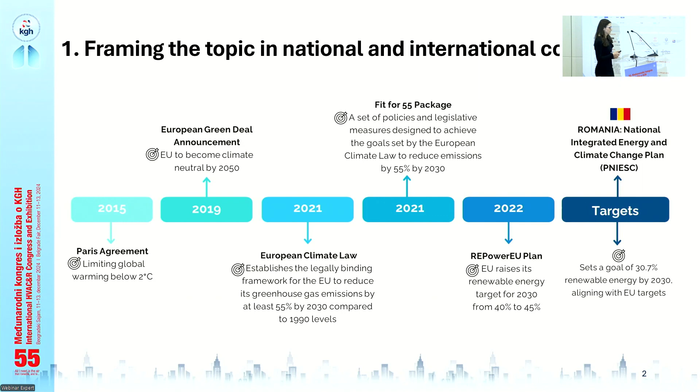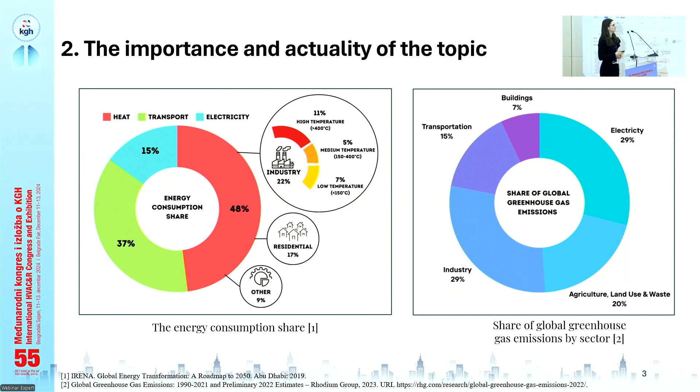48% of the energy demand is consumed as heat, and 29% of the greenhouse gas emissions is represented by the industry. In this context, heat recovery and storage systems can play an important role to promote a sustainable future.

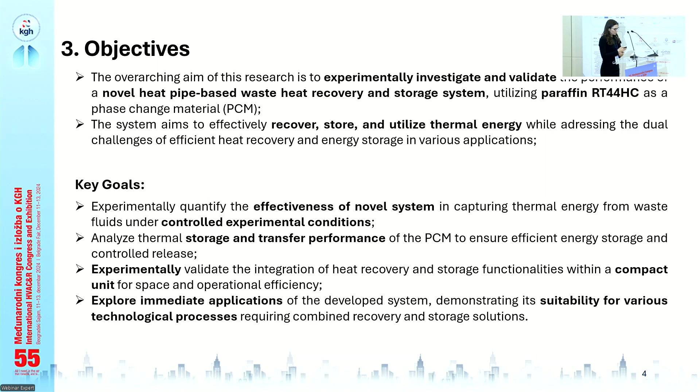The aim of this research is to experimentally investigate and validate the performance of a novel heat pipe-based waste heat recovery and storage system utilizing paraffin RT44HC as a phase change material. The system aims to recover, store, and utilize thermal energy while addressing the dual challenges of efficient heat recovery and storage in various applications. Among the key goals are quantifying the effectiveness of the novel system, analyzing the thermal storage and transfer performance of the PCM, experimentally validating the integration of heat recovery and storage within a single compact unit, and also exploring the immediate applications of this system.

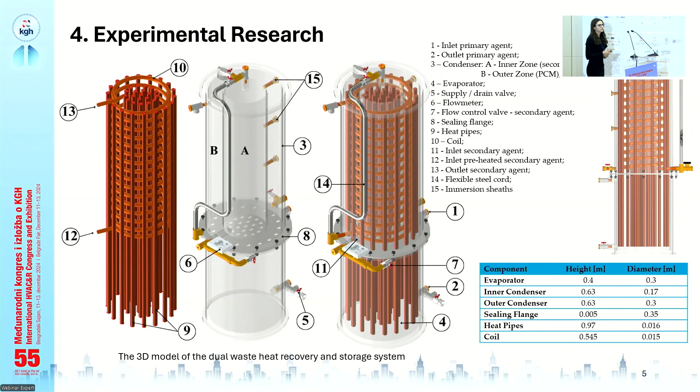The secondary agent heated in the inner zone can be rerouted through a coil which is embedded within the PCM in order to extract the thermal energy stored within the PCM. Also, the primary agent from which the heat is extracted, which flows through the evaporator, is water. In our experiment, it was water generated by an 8 kilowatt electric heater.

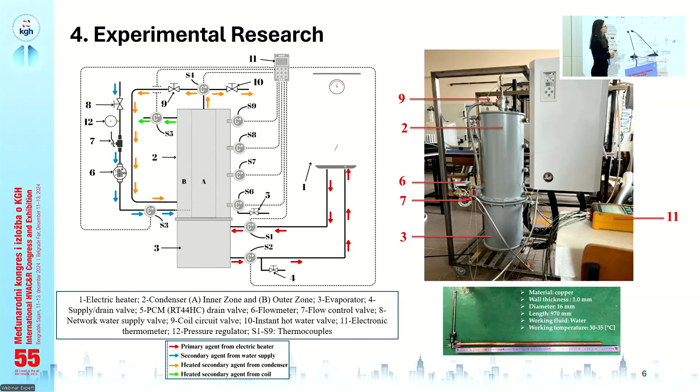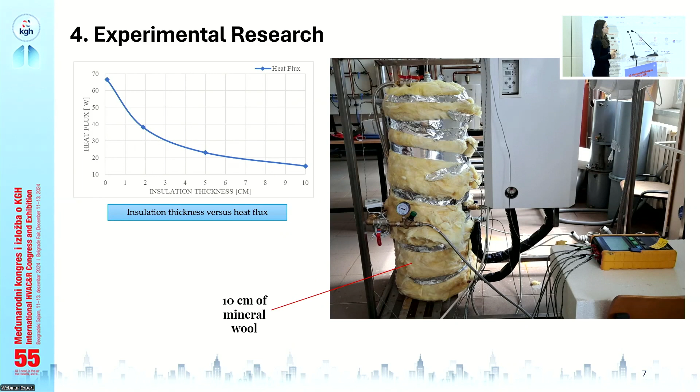The temperature is monitored by 9 type K thermocouples, which are placed in the inlets, outlets, and also along the PCM from the base to the top. The temperatures are registered by an electronic thermometer. Also, in order to prevent heat losses, 10 centimeters of mineral wool was chosen.

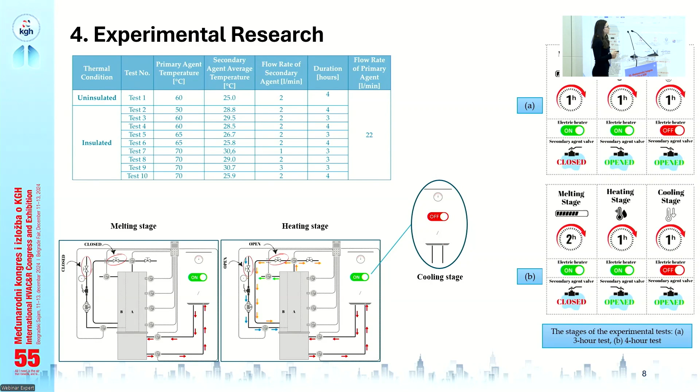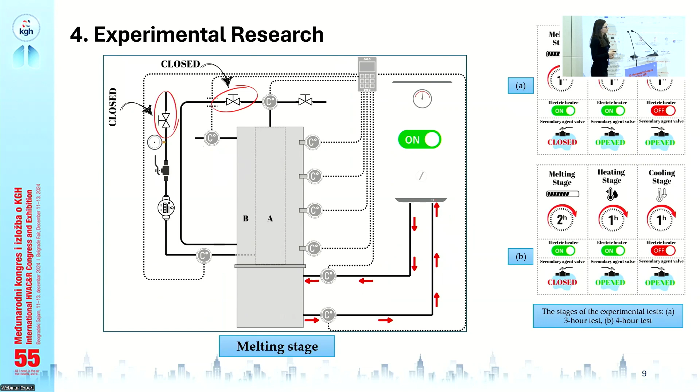We divided the experiments into 3 stages: melting, heating, and cooling. In the melting stage, the valves for the secondary agent were closed while the electric heater was turned on in order to focus all the thermal energy towards melting the paraffin.

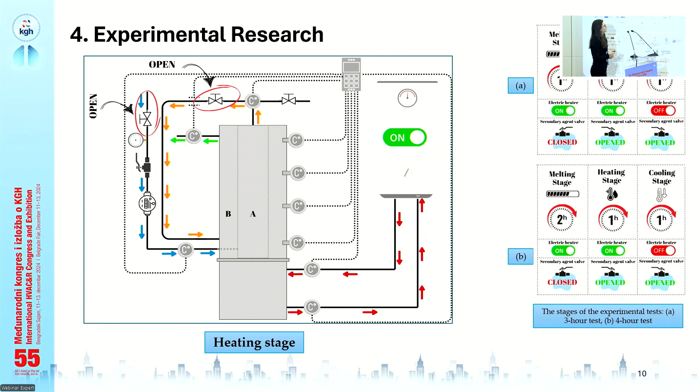In the second stage, the valves were open, allowing for the secondary agent to circulate through our system and to generate instant hot water. In the third stage, the cooling stage, the electric heater was turned off, allowing for the secondary agent to absorb the thermal energy stored within the PCM.

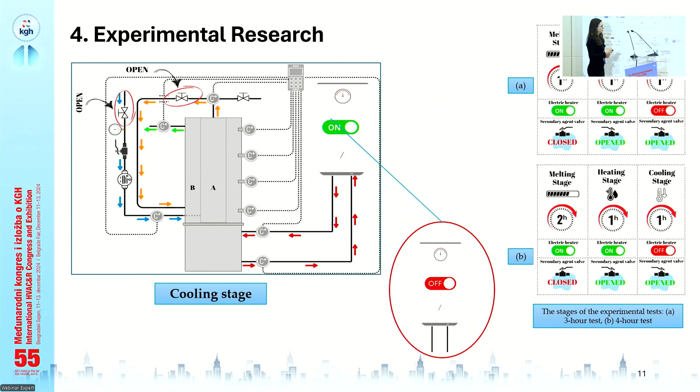For the analysis, we grouped the tests based on the parameter varied, and here we can observe the sensors which were placed in our system.

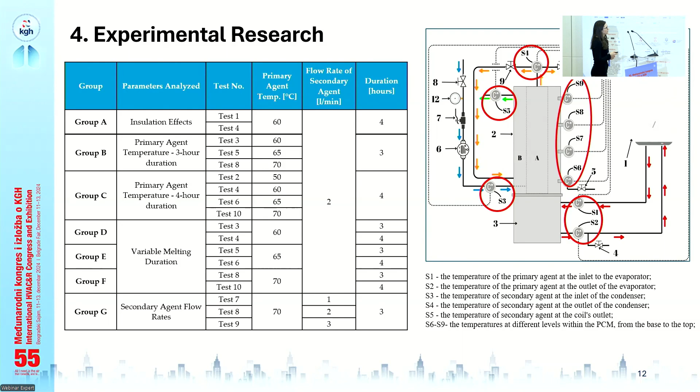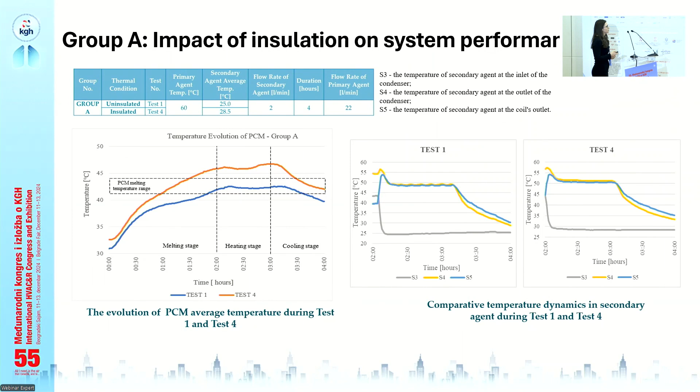For the first test, this served as a baseline scenario, which was conducted without insulation, and validates the fact that the insulation promotes both a better melting, a faster melting, and also higher temperatures in the secondary agent.

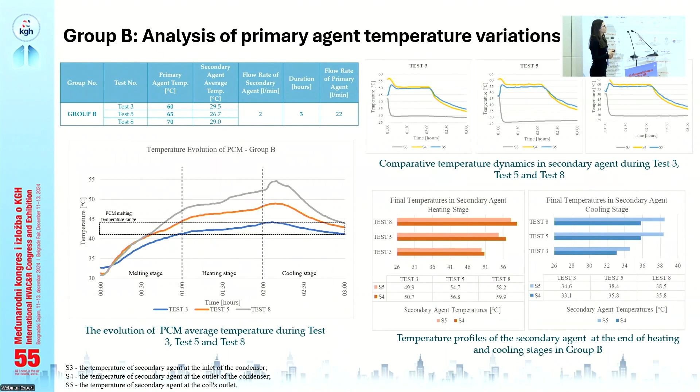Group B focused on the analysis of the primary agent variation. The primary agent was varied between 60 and 70 degrees, while keeping a 3-hour duration test. Test 8 performed the best. This demonstrates that having a higher primary agent temperature results in more sustained temperatures within the PCM and also the secondary agent.

Group C focused also on varying the primary agent temperatures, but having a duration of 2 hours of melting. We also employed a case with 50 degrees for the primary agent. This was notable and validated that our system can effectively recover thermal energy even with a lower primary source.

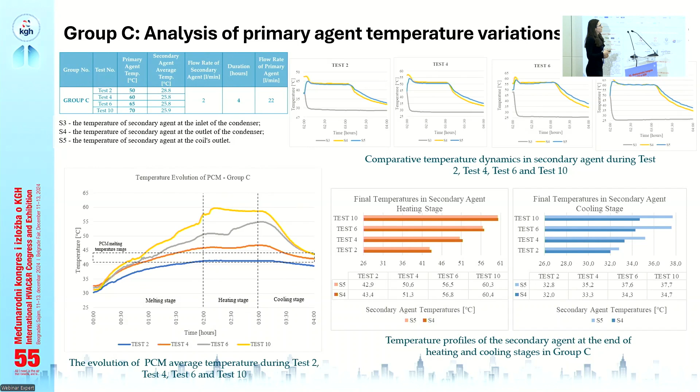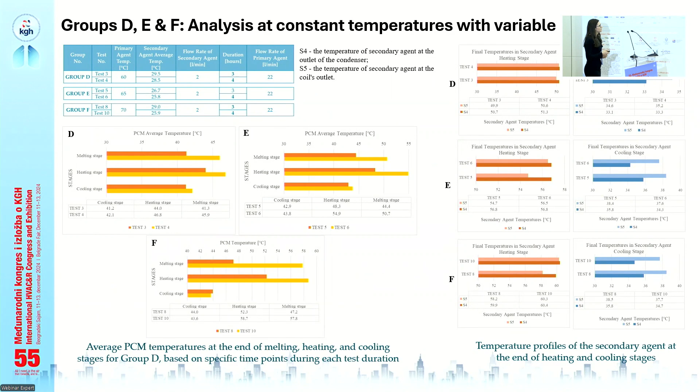Group D, E and F focused on varying the primary agent temperatures at 60, 65, and 70 degrees, with a duration of 3 and 4 hours. This demonstrates that extending the melting phase is very important, because as we can see, in the melting, heating, and cooling stages, we had the highest temperature in the 4-hour duration tests.

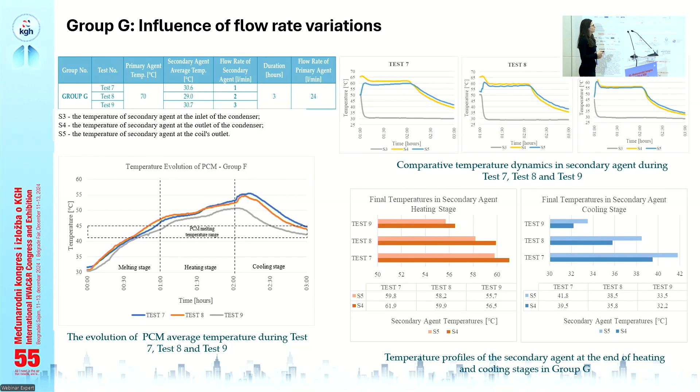The last group focused on varying the flow rate for the secondary agent to 1, 2, and 3 liters per minute while keeping the primary agent temperature constant. Observing the temperature evolution of the PCM, we had the highest temperature in the case employing the lowest flow rate. This also demonstrates that the system performs best with lower flow rates for the secondary agent and higher temperatures.

In terms of efficiency and performance, here we can see some graphs with the temperature gains in the heating and cooling stages. From the 4-hour duration test, test 10, which employed 70 degrees for the primary agent, performed the best, gaining 34.3 degrees Celsius during the heating stage and 11.3 degrees in the cooling stage.

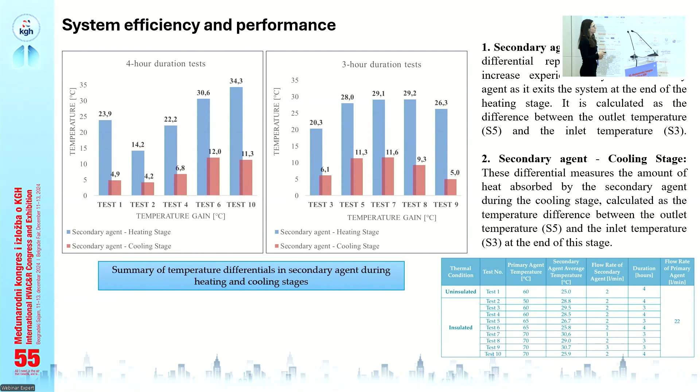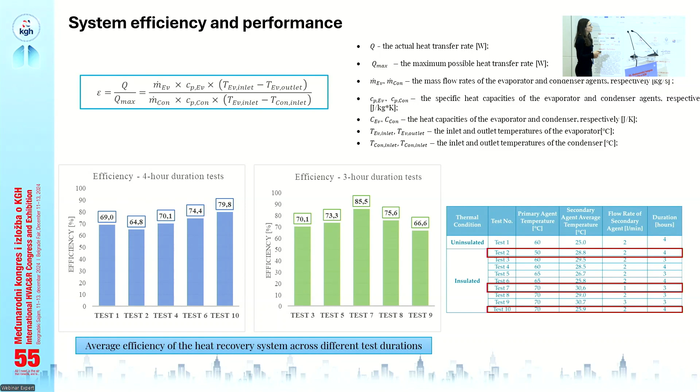And in the 3-hour duration test, test 7, which employed 1 liter per minute and 70 degrees for the primary agent, had the best results. In terms of efficiency, again test 7 had the best efficiency of 86%, while test 2, employing 50 degrees for the primary agent, also has notable results.

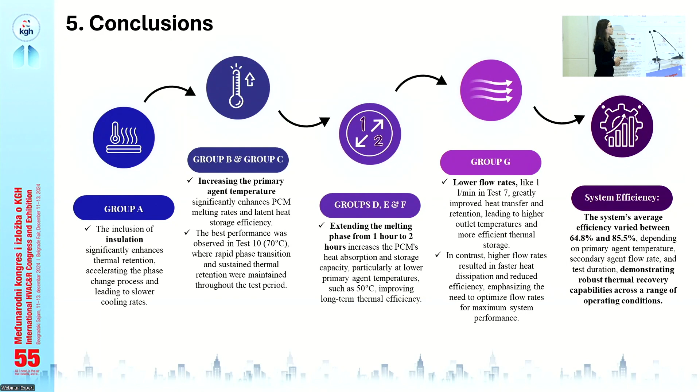As conclusions, the inclusion of insulation enhances the thermal retention, and also increasing the primary agent temperature along with extending the melting phase from 1 to 2 hours and lowering the flow rates prove to be optimal for the system. The system's average efficiency varied between 65 and 86%, which demonstrates its robust thermal recovery capabilities.

Before going to the potential applications, it's important to note that this system captures thermal energy from low temperature sources. It utilizes high efficiency heat pipes for almost instant hot water production. It incorporates paraffin as a phase change material, and it has a dual functionality within a compact and efficient unit.

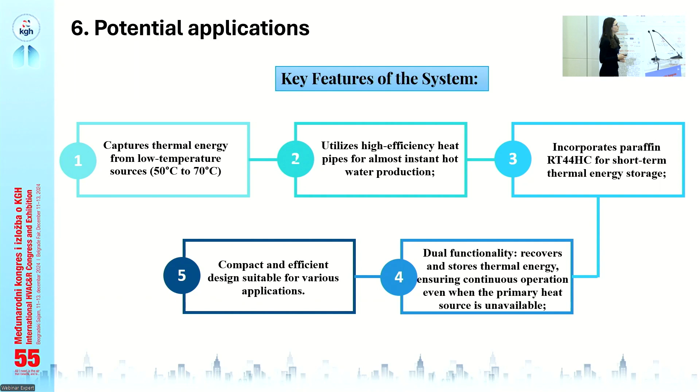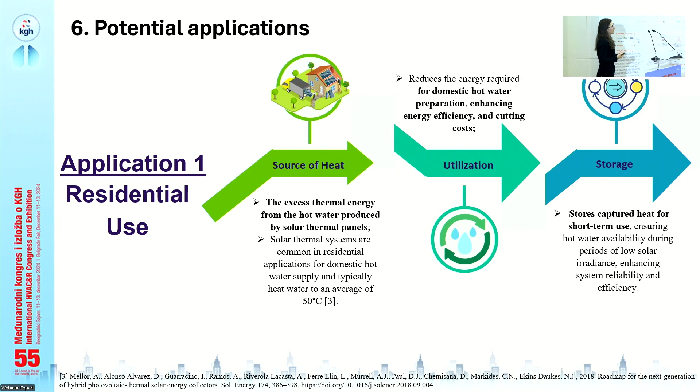This system can be utilized in residential use, where it recovers thermal energy from the hot water produced by solar thermal panels, from the excess thermal energy, which has an average of 50 degrees Celsius. In this way, we can reduce the energy required for domestic hot water preparation, and also we have the ability to store the captured excess heat for short-term use.

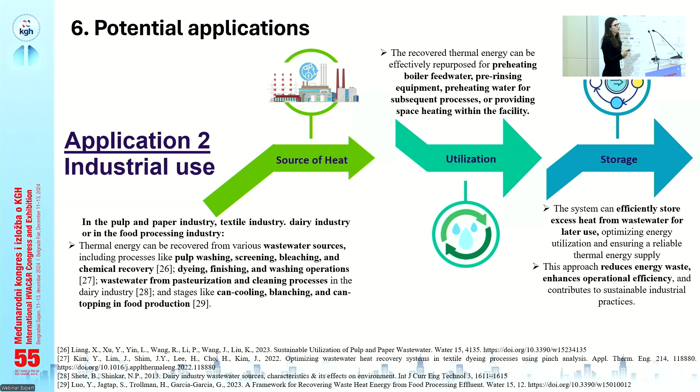And in industrial use, it can be used in the pulp and paper industry, textile, dairy, or in the food processing industry, where thermal energy can be recovered from various wastewater sources and processes. We can use the thermal energy for preheating boiler feed water, pre-rinsing equipment, and also we are able to store the excess heat in order to reduce energy waste and contribute to industrial sustainable practices.